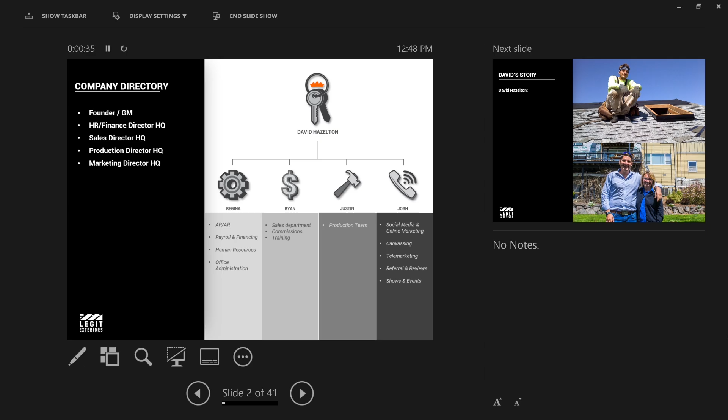Okay, so we're going to go a little bit over the company, the company directory. So Regina, she's helping out in Vancouver for the finances. If you guys have a problem with your check or something, you can feel free to call her up. Ryan's part of sales, Justin runs the production department, and then you have Josh helping out with a lot of the marketing stuff. So if you can't get a hold of Ryan or anybody to say, hey, my appointment's not here, you can call the office, ask for Josh, and he can help you, maybe call the customer. Or if you guys are at the office and need some marketing tools, ask for him.

Here's my story. This is kind of built for somebody else telling the story if they're presenting this, but for my story, I was born here in Portland. I moved out when I was 5 years old, moved across the bridge to Vancouver, and lived there ever since. Actually, I was up in Oak Harbor, Washington, had my daughter up there. I was on a big commercial job for the Navy on Whidbey Island, doing some roofs over there for a little bit. I have 20 years in the roofing industry, so I've been doing this since I graduated high school. I'm 37 right now.

So from roofer to business owner, this is my business. On September 29th, 2011 is when I founded the company, but I didn't have it handed down from my dad or anything like that. It came from the ground up.

So my mission is to be honest, to have a great home improvement company, to be the best home improvement contractor in the Pacific Northwest. I think that we're the best. I know we're the best roofing company, but to be the best home improvement company is a big vision, right?

To improve the quality of life for others, employees, homeowners, families, and communities. We do a lot of free roofs. We are in the community. There's a lot of new companies popping up, but I think their struggle is just not being in the community. I think being in the community is a big part of our success over the years.

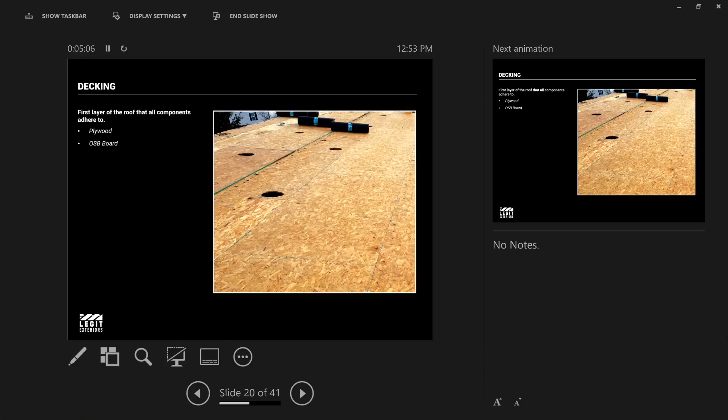So space sheathing is another one. Why in the heck would we use this stuff? We don't use it anymore. Why did they used to use it? Probably because it's cheaper, less material. I don't know if it has something to do with like the air breathing. Not necessarily - I mean, it saves money because typically that would be underneath a cedar shake, which is wood.

Whenever you see this stuff, if you're in an attic, there's no shingles up there directly - there might be in separate layers, but typically you'll see it. If you put a shingle on this, it would just sag over time, pond water, and leak like a sieve. So you're gonna have cedar shakes on it.

So if you guys ever get up there, peek your head up in the attic, and you see this, it's got shakes on top. Even if you're on the house and you take a picture of it and see shingles, the homeowner's always gonna say it's one layer. But when you go up in the attic and you see this stuff, you know it's more than one layer.

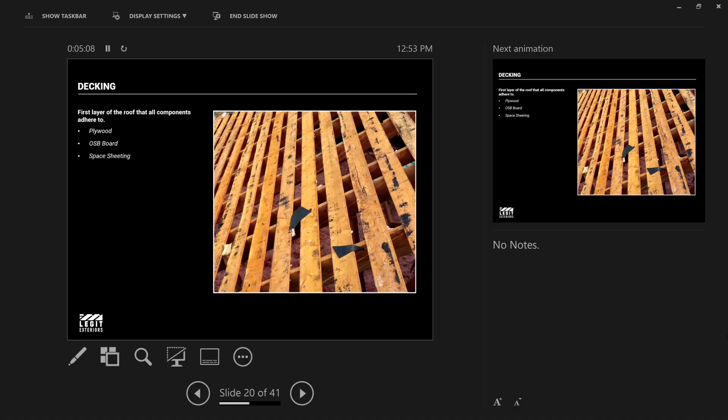We're not gonna get into details about exactly how to measure and all that - it's a lot, but you guys get the gist. Now, if you're ever looking to see how many layers and you're in the attic, you can go up by the vent and kind of feel - you can see how many layers there are by the vent hole, because the roofer has to cut it. So space sheathing, we know what it's for. Shiplap - the reason why, I'm just speculating why they call it that, is because it looks like a ship's lap.

So this right here, we can go over. Unlike space sheathing, you have to put plywood on top. The plywood has to go on top. If you don't, I mean, you have to.

It's just impossible to roof without it, right? Now, shiplap is similar. If it's healthy and strong, we can go over the top. We don't suggest that we always want to go over the top, because plywood makes a nice flat foundation for the roof to sit on.

However, the reason why we like to go over it - if you guys see that hole right there, and there's another hole right here, and you can see tin shingles, there's a couple more holes. So if you put a nail through your shingles and it goes through a hole, is that going to hold anything? No, right? So we have to put those on.

Now this shiplap, if it has more than - I'm pretty sure it's a quarter inch apart - so when these boards come across, they put them together. If it's more than a quarter inch, we have to put on plywood for warranty issues.

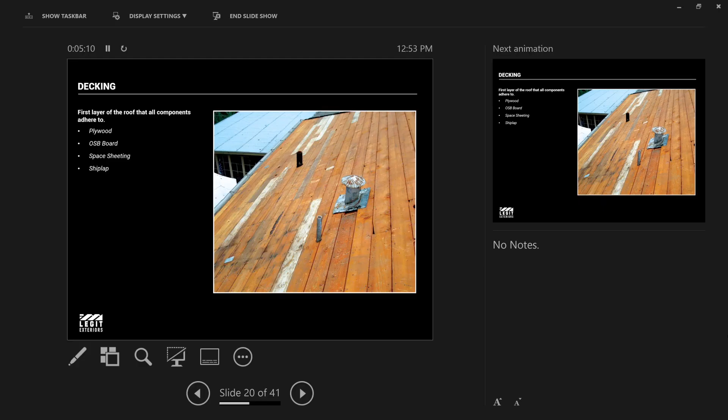Tongue and groove, we can go over this stuff. It's really common - first of all, tongue and groove, it's usually 3/4 inch, and it has a little tongue and groove, a male and a female end that just connects together.

This stuff's beautiful, first of all. It's really gorgeous if it's done right. A lot of the times the reason they don't use it is because it's super expensive. I mean, this stuff is so expensive you don't see it anymore. You see it on really old homes, and usually where you see it is the overhangs, because it was so much money.

So you'll see tongue and groove on the overhangs, and then in the middle you'll see space sheeting, because back then shingles weren't even invented yet - it was all cedar, wasn't it? Yep, exactly, up here.

I have a 100-year-old house that definitely has that - we found all kinds of things. Cedar burns really easy too. That's why we try to get rid of it.

In California, a lot of it's like tile, right? And if you broke a piece of tile in California, imagine how hard it is to find a match if it's a 100-year-old house - because they're taking them and bending them over the knee, so you have to be like, hey, where's that guy's knee at, to make another piece of tile. So they're all a little bit different.

So basically, the tongue and groove, we can go over it typically because it is connected and they are together really tight. But we still, to pull up all these nails and prepare it, I would always suggest putting plywood on. If it doesn't have plywood, we suggest putting plywood on because it's a better install, right?

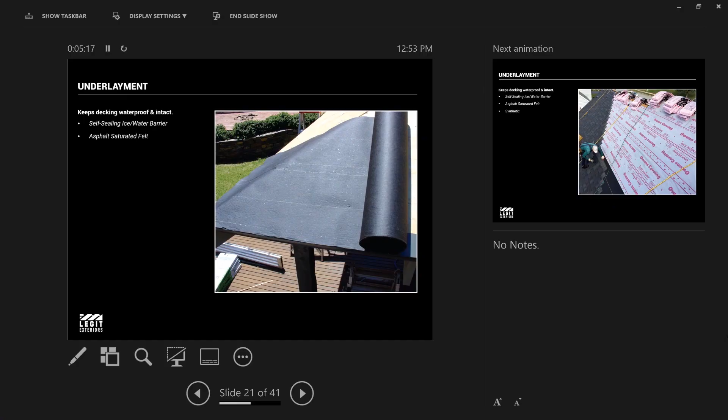Otherwise, he wants me to take it all off and replace it, but that can be costly. So they came out with synthetic, which does not absorb anything. It's a lot lighter for us to carry up. It's actually better for the world, really. It's synthetic. Yeah, it's awesome stuff, right?

So I'm sure Ryan's talked to you a little bit. I don't want to go too far into what it is, but this is just kind of what it is. Flashing drip edge metal. So there's two places where you put drip edge metal. You're gonna put it along the fascia and on the barge. What area is the fascia called? Which we're gonna get to. This is almost later, should almost go back to this. I'm gonna go back to this because you haven't learned the anatomy yet. This should actually be later.

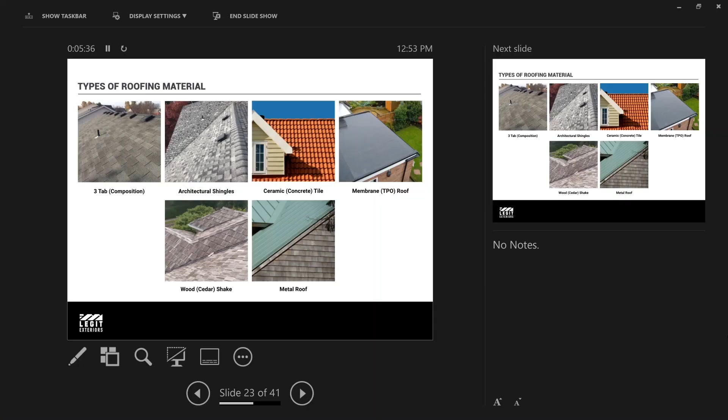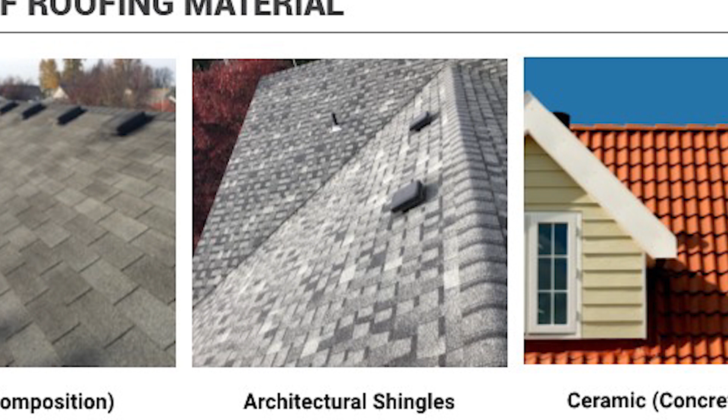All right, so let's talk about types of roofing. 3-tab. You guys all know what 3-tab is? Is that 3-tab, Tracy? What is it, RJ? Architectural, right? So 3-tab is kind of a thing of the past. We really typically don't install it. I've been doing this like 20 years, and I've installed maybe 10 3-tab roofs. It's old school, like super old school. Is that the one that has like 3 little tabs? It has 3 tabs. If you look at a shingle and see 1, 2, 3 tabs, that's 1 shingle. So it's 3 tabs. It's really thin stuff, kind of dated, and there's just no dimension to it.

Pretty cool. We also have concrete tiles, which you're going to run into. Concrete tiles, so what they are, they're really concrete. They don't really work that well up here. Sure, you could do a great job, but what happens is the sand will start wearing off of the tile or the concrete, and it'll go into the valleys, and about 20, 25 years later, it doesn't find its way out of the valleys. So it'll back up in the valleys and it'll leak a lot because we get so much rain. Like if you're in California, they don't have that much rain to really wear it off. I'm sure it would take a lot. They perform a lot better in the Southwest than they do in the Northwest. Arizona or something, sure. I was down there a couple years ago, and I'm looking at these roofs, and there's no shingles, like the shingles are missing. And I'm like, well, when it does rain, what are they gonna do, grab a bucket and just put it on it? Monsoon season, that does it.

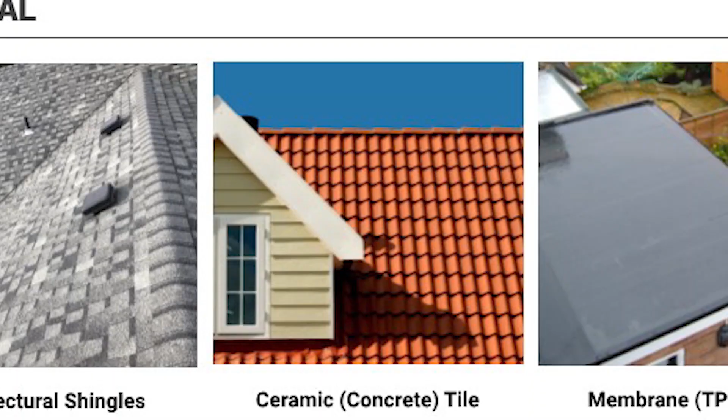Okay, so the flat membrane, there's TPO, there's torch down, there's a lot of different flat membranes. What we use is the deck seal. So you guys are going to use deck. There's a lot in here, that's just a membrane. This one is a TPO, but does that kind of make sense? So you guys have all seen it. It's going to be really hard to identify each one today, but it's a flat, they call it a membrane roof, and we use deck seal. So if you guys go to a house, there's a back patio, it's Owens Corning, we use the deck seal. Like on shed dormers, you see that, or if it's below a 3:12. So if it's a 3:12 and below, we're gonna go ahead and use the deck seal. Why do you think that is? Just, you can't drain enough water off. Exactly, yeah, it kind of welds together. So basically this sticks to one another. I don't have an example, but it rolls on and welds together basically. So it performs better on low pitched roofs.

Now, then they have cedar shakes or cedar shingles is what they'll call them. The shakes are the real thick ones. Typically you can't recover those because they're so rigid. And then they have shake shingles, and the shake shingles you can actually recover those. I don't suggest it, but you can. You guys will see it a lot up here. You'll see 2 layers, 3 layers, and it'll get really thick. But typically it's shake shingles.

If the homeowner calls it something else, I wouldn't correct them, but technically it's shake shingles, not shake, or cedar shingles, not cedar shakes. They're two different things. Cedar shingles are what you see on siding, and shakes are the real thick ones you'll see on 80s homes.

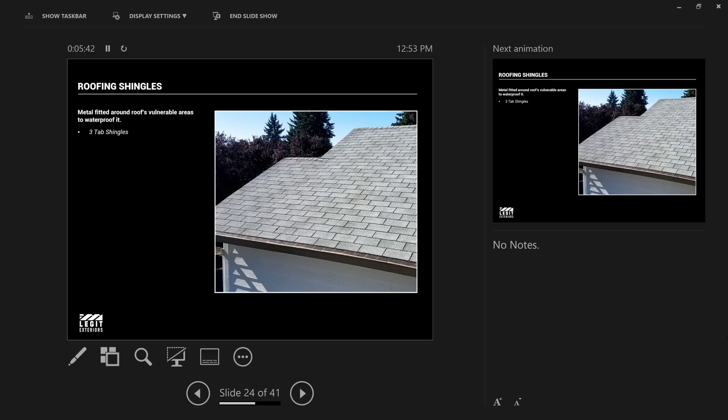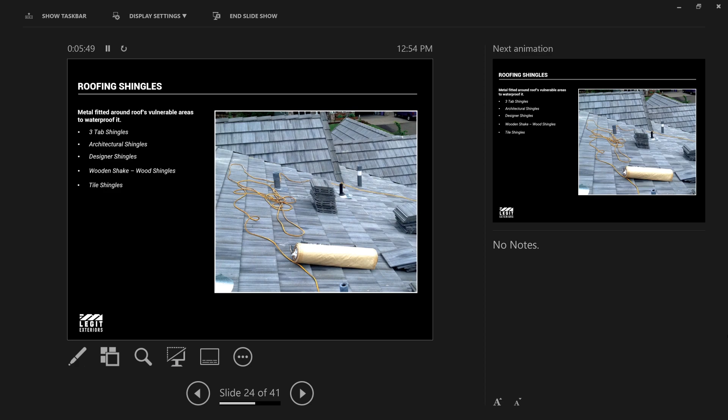And then you have the shakes, and then the tile. Actually, on this tile job, I don't know if you guys ever noticed my crooked hand, but I almost lost my fingers on this job. I took a picture of it, it was pretty crazy.

Yeah, we were doing that job, probably like 10 years ago. All right, here's where the roof anatomy comes in. I wasn't here for this - did you guys go with the chimney? I'll go over the roofing anatomy first, then come back to the chimney, just the separation from it.

So what we're gonna do is go over this roof, the anatomy of it like a skeleton, basically. This roof is one we actually did - we did the roof and siding on this home, and it was so complex I decided to use it as a good example. Stafford actually sold this one, the Hansons - it was a pretty big job.

And these pictures that you're going to be seeing, they're not necessarily on this job.

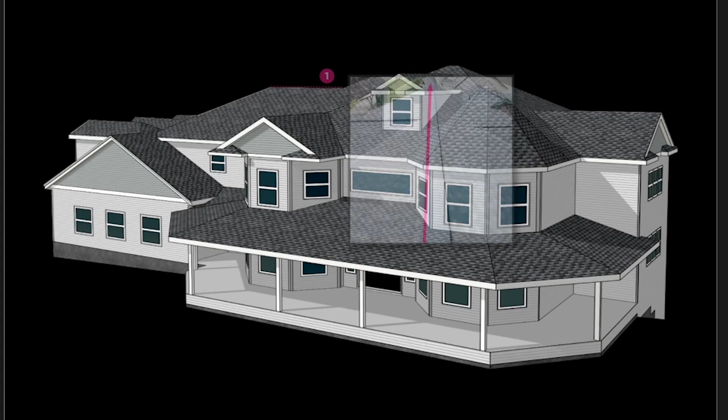So RJ, what's number 1? That's the hip and ridge. Good, actually it's not a hip, it's just a ridge, right? Yeah, hip and ridge, it's kind of the same thing, but we'll get to that in a bit. So ridge, we all understand what the ridge is. It can also, we're not going to go into the vent. This is kind of the anatomy of the roof. All right, number 2.

What is this area called, Mark? Well, the white part of it, that's the fascia. That is, but what's the area as a whole? So great that you know that. So the board is called the fascia board, but the area as a whole, what's it called? Down there by the gutter, right? There's a lot of components that go onto this, what? Eave, right? Eave. So the eave is like the area down there. So fascia is part of the eave. We'll get into the different areas of the eave coming up.

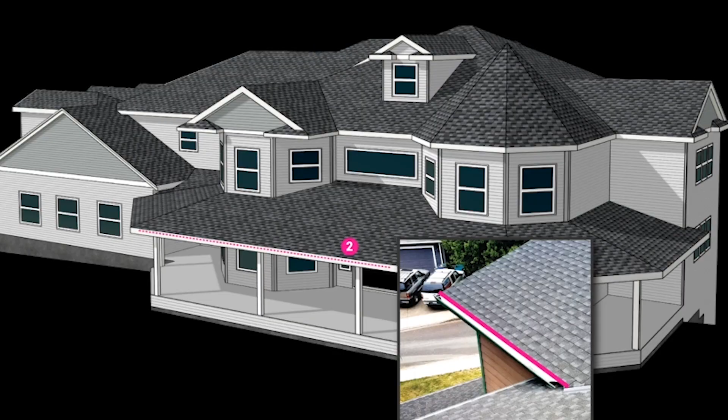Well, what's this, RJ? What is this? That's the hip, right? Yeah, so hip.

I was actually supposed to give that to you guys later, as part of the test. Exactly, that's my fault, it's all good. We'll follow along, guys, I just gave you the test to copy, so that's my bad. All right. Oh, that one. Okay, you guys ready?

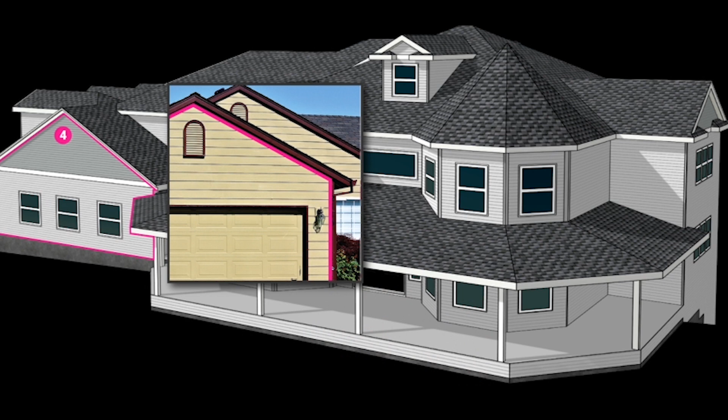So 4, right, is the gable, but this line needs to come off, right? And so the gable is kind of this triangle up there. The gable is kind of the triangle above it. Now below it right here, this is kind of the wall. It's just the wall, but it's the gable end. You can see the gable end, but it's the gable. The gable's the triangle above.

All right, little bonus, Mark. What's actually this, Chris, this little white line? Belly band. Belly band, there you go. All right, so it's not, you don't have to, just a little extra credit.

Number 5, what's this area called, Tracy? Or RJ, whoever comes first. I wish I had like a little gift card. Oh yeah, money gun, who's got it first? Money gun, yeah, Cash App. You guys don't know what this area is called? Well, good thing we're here then. Starts with an R, and it's a tool. You guys have probably heard it. It's a tool, and it starts with R. Are we talking about rafters or something?

Rafters, it's close, but it's the area. Rafters are what goes on this area, but it's called the rake. So the rake edge. Oh, well, that's because they call them rake rafters. Yeah, you can call them rake rafters, replaced those in my place. Yeah, there you go. Rake rafters, there you go. We call them barge boards. Barge, yeah, that was the other one, barge rafters or whatever. There you go. So that's the area, right? It's the area again, the rake edge. So you're gonna have rake metal, you're gonna have the area. If you're on the roof, you're like hey, go to the rake edge and get the shingles over by the rake edge or whatever it is, right? It's the area.

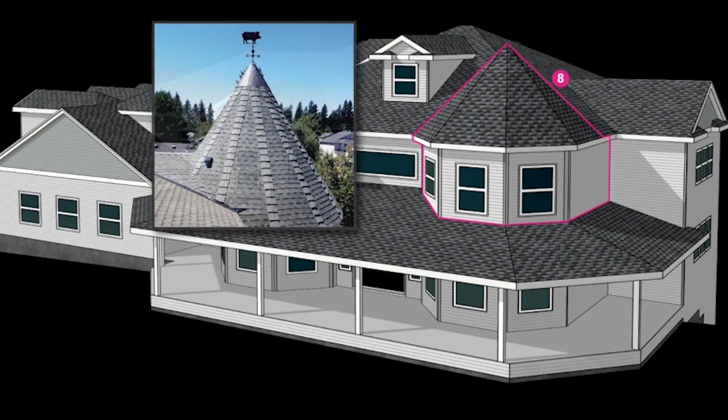Or you can call it a turret. Some people call it a turret. I was thinking maybe something like Madonna would wear under her shirt. Yeah, there you go. So basically, witch's hat or turret, I can't really think of any other names right now, but that's pretty much what we call it — the expensive part. Yeah, exactly, that expensive thing up there.

All right, what is this just called? I call it money. Yeah, I just call it money. There you go, see all that money?

Okay, so what's this piece of wood called, RJ, that goes along here? Is that the front part, the fascia? Yep, exactly, good. How do you spell fascia, Tracy? Is it F-A-S-C-I-A? Ooh, that's good. Yeah, I had a problem with that too. Yeah, it is. I suck at spelling. I had to do a lot of research.

I'm just keeping you guys awake, right?

All right, so fascia board goes on what area, RJ? What's that area called, without looking at your paper? The eave. Okay, 9 and 10. What is this area called under the eave, Mark? Soffit. There you go.

Is this open or closed soffit? Open, right? So open or closed soffit — do you guys know the difference? RJ, do you understand the difference? So an open one would be like a vent, right? Yeah, you would see — so you wouldn't see these. What are these called? I wish this was on here. The boards that go underneath the plywood are really called trusses, right?

Or they're called rafters. What's the difference between a truss and a rafter? Mark, what's the difference between a truss and a rafter? Nothing. Nothing.

Isn't a truss prefabricated? Good job on that. So basically, with a truss, like stick frame homes, the old homes are rafters, and you won't see the metal in between the wood. A truss comes from the factory and they load it onto the roof, and that's the difference between a truss and a rafter.

Soffit, funny spelling too. You know what's crazy, I was thinking about 'lead' because I'm not the best speller either - how many different ways are there to spell lead? Like I led the way, L-E-D, like the lead flashing.

So yeah, this is a closed soffit. Now you can have venting down here too. This is typically where you're going to see your ventilation, which we'll get into. If we don't, we can go back to it. Some of this, I don't know if you've seen this slideshow, so we'll go over it really quick.

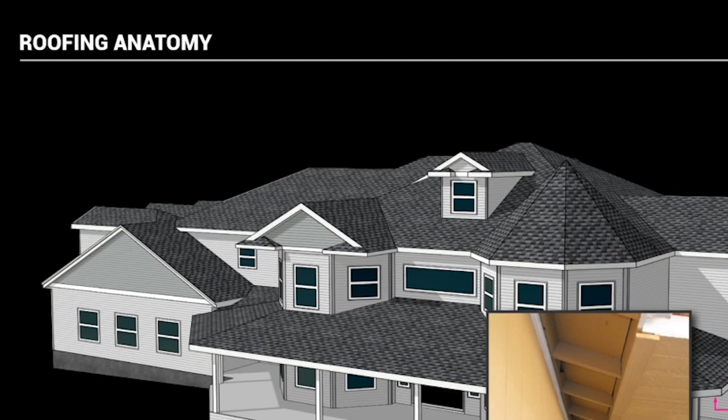On the appointment process, things you're going to look for on the roof: check the gutters on your inspection sheet, check for layers, check other components, check the shingle condition, check the chimney, take pictures for evidence and urgency.

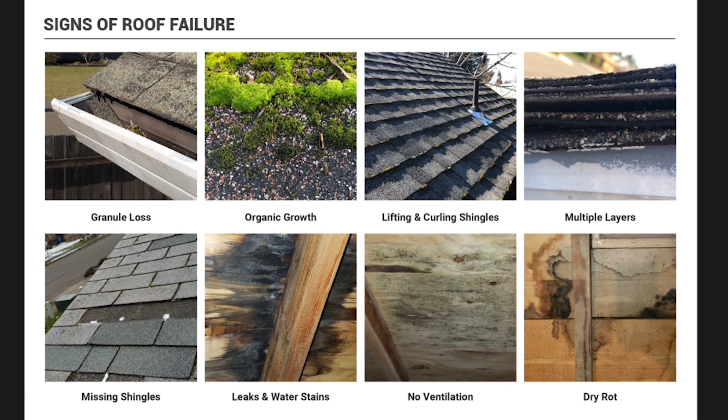And here are some signs of roofs that are failing: granule loss, organic growth, lifting and curling, multiple layers, missing shingles, leaks and water stains, no ventilation or bad ventilation, and dry rot.

What's the best way to notice dry rot? So first of all, what is dry rot? Dry rot is something that's been wet and it turns dry. When it's dry, you'll see it, and you'll see it on so many homes.

A lot of times on the fascia boards, rafters, or underneath the eaves, really close to the gutters. You can just take your finger - I like to do it right in front of them - and poke a hole right in front of them. They're like, well, don't damage your... what?

This is shot, man. Like, I can't, I'm sorry. That's like me, it's not good, you know what I mean? So I'll just show them how bad it is, like it's got to be done today, you know what I mean? And it's terrible. But that's what dry rot is.

So if you guys see it, show the customers, or take a picture or video if you're out there, because sometimes we're not always going to be out there with you. Stick your pen into it - it'll stick, stay there. Because it becomes like a sponge, like a crumbly sponge. It's like a burnt piece of toast.

And ventilation, you'll notice from the organic growth in there. Leaks and water stains are huge. Lifting, curling shingles - why do they lift and curl? Because they get dry and they'll curl.

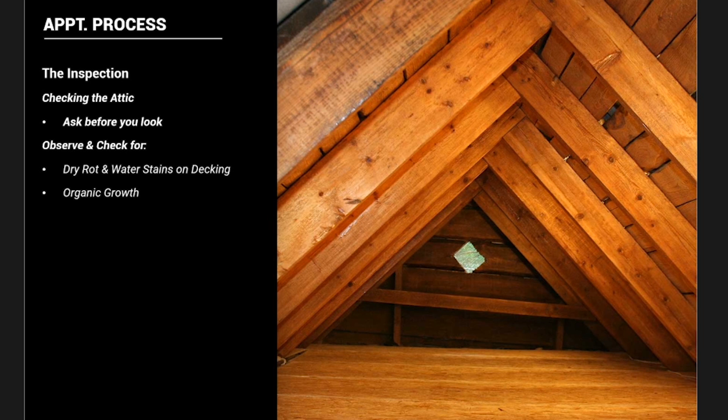But measure the roof, calculating actual square footage, length by width, and that's a lot of stuff. The inspection attic - ask before you look. We'll skip through this stuff.

Ventilation is a whole day in itself, but we're going to go over it in a nutshell. There are tons of YouTube videos you can look at, but it's simple: cold air in, hot air out. If you don't have cold air coming in, you won't have any air coming out, even if you have all the exhaust ventilation. Vice versa, if you don't have ventilation on the ridge cap but you have intake ventilation, it's not doing anything. It's stagnant air, like a straw. Can you imagine taking a straw, putting your finger over the end, and trying to suck? Even though it has one hole, it's not going to do anything.

Also with ventilation, I'm sure Ryan talked about this, but we want to use one system. You have intake all the same, and you have exhaust.

Especially for exhaust, cold air can come in, but when it comes out, it's really common to see somebody call up a roofer and ask for a solar attic fan or an attic fan, and the roofer will come and slap a hole in and call it good. No, it doesn't work like that.

Here's why, just use your imagination. If you take a straw and start poking holes in it, and you have a glass cube, and the straw goes into a hole in the glass cube, and you start sucking, the object is to get all the smoke out. Let's say we filled it with smoke and had a machine sucking. It's going to go to the least resistant point to get all the air out. Does that kind of make sense?

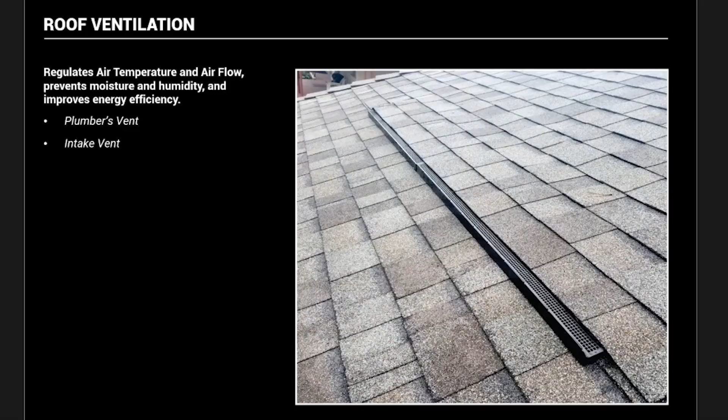Intake vents - what are these called? They're intake vents, Owens Corning VentSure, ridge vent, smart vents. This is VentSure exhaust.

I have a question - can you put the ridge vent on and not the intake vents? Yeah, if you have adequate intake ventilation, then sure, you can use the ridge vent. How do we know that? Well, that's a whole other class, we're in anatomy today. It's a calculation - you calculate it out.

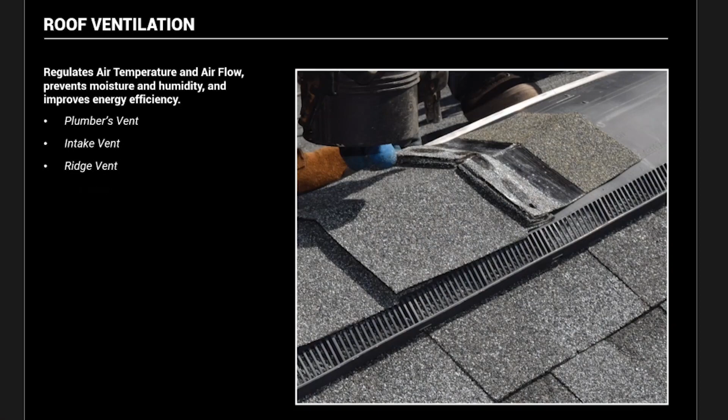So for tomorrow we're done. There's another one, I think, but what time is it? 11:30 - you guys want to take a break and come back? I think I might have a little bit more, I mean I can go. Do you want to go talk a little bit about shingles, or did you pretty much sew that up?

I think the chimney thing - oh yeah, let's go back to that. As far as counter flashing and base flashing, I just told them to do base flashing every time and let production work it out. Didn't we have a video of that? We just had a video of that last week.

I'll show you guys here - okay, look, here it is. Oh yeah, let's go back to the flashing, because I was going to do roofing anatomy before I got into flashing, that way you understood where everything went.

All right, flashing - drip edge flashing, right? Where are we gonna put the drip edge? This is obviously drip edge flashing, this isn't really the picture. So we use 3 inches up on the roof and 1 inch down into the gutters, and the gutters go behind the flashing. This gets installed on every single roof, and a lot of times you guys will go out there and not see this - it's hardly ever there.

So that's something to point out - take a picture of it, show them when you're showing them your inspection report, show them that they don't have any, and say, see how this is rotting because you didn't have any of this? That's why the flashing protects you. It should also help you judge how old the roof is or if it's been replaced, because more often than not, when we see the drip edge, it's probably been replaced in the last 15 years or so.

If we're questioning whether or not the roof has been replaced, drip edge metal and metal valleys can be an indication. If we're out there replacing a roof and see this, more than likely it's been replaced, because new construction crews probably aren't doing that. New construction doesn't put this stuff on at all - too much money, they go super cheap. 99% of the guys don't put it on.

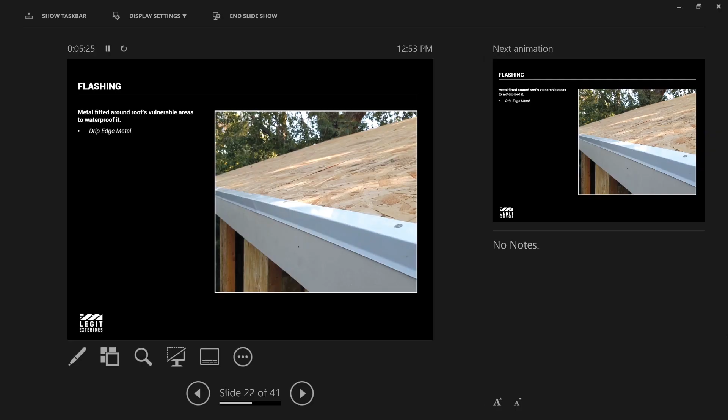So we use rake metal, T metal, along the rakes. This is a good picture - this is what we do, this is what we use, T metal. Why is it T metal? Because it looks like a T. Now why don't we use this kind of metal? This is called D metal. There's a bunch of different metals, but there's only one that's 90 degrees with one little crease on it. I don't remember what that crease is called, but what are these for?

Helps the debris run off maybe over the gutter, bigger debris. But why do they make these bends? I don't remember what the crimps are called, but why do they make these crimps in the metal?

Probably durability, they're stronger - there's a couple reasons. One is to get this water out of here, so it doesn't just go straight down the fascia board or the barge board. What's another reason? It's stronger - 100%, absolutely. If you just did it at 90 degrees and you're carrying the stuff, it'll start bending. It'll actually look terrible when you put it on the roof, because you'll see waves inside of the metal.